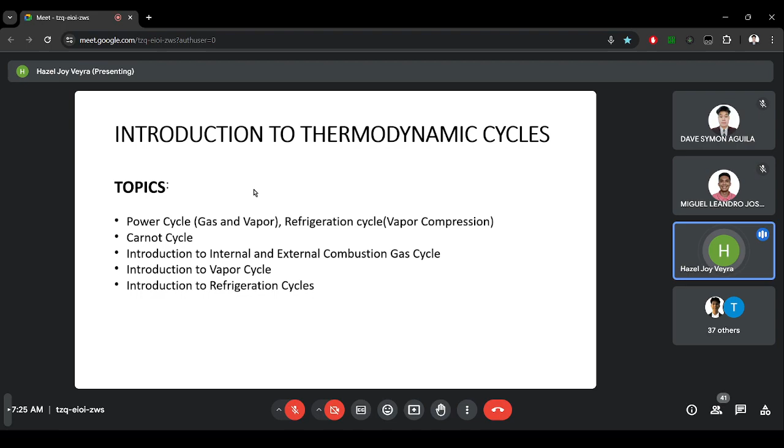Okay, so to start, we have two important areas of application of thermodynamic cycles. First one is power generation and second one is refrigeration. So what do you think, guys, is the difference between the two? Anyone, you can raise your hand. What is the difference between a power generation and a refrigeration cycle? Class, anyone?

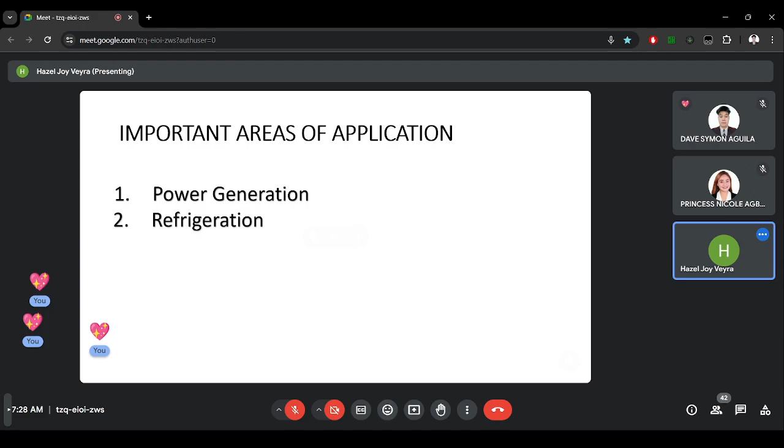Sige nga, Miss Kalingasan, can you discuss: what is the difference between the two? Ma'am, kapagka po power generation, usually po yun po yung pinaka-energy source po ng mga thermodynamic systems. Tapos kapagka naman po refrigeration, parang doon na po umiikot yung magiging output po. Output of? Output po ng mga cycles po.

Okay, so to repeat, class, power generation is more of generating power. So you will have here the work or power being generated by your system, or energy generation. And then for refrigeration naman, these are systems that are used to produce a refrigeration effect. So dito papasok yung ating mga HVAC. For example, we have the air conditioners, refrigerators, or heat pumps.

So have you heard already of the acronym HVAC? Class? Are you aware of the acronym HVAC? Yes po. What is HVAC? HVAC stands for heating, ventilation, and air conditioning po. So, yes, that's correct. That's why, class, thermodynamics 1 is very important, since after this course you are going to proceed with the next application of thermodynamics, which involves HVAC, heating, ventilation, and air conditioning.

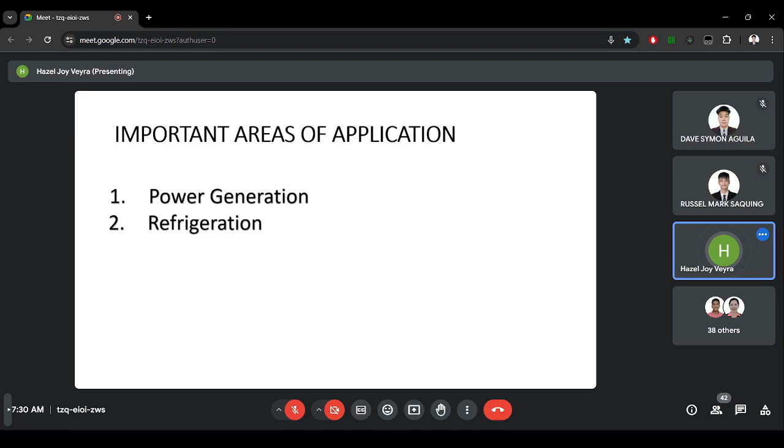So, if your foundation in thermodynamics 1 is not that strong, or you're not well versed with the concepts of thermodynamics, then it will be hard for you to proceed with the other areas of application. So yeah. Okay, so next we have the two general categories of thermodynamic cycles.

So we have power cycles and refrigeration cycles. This is similar with what I mentioned earlier. So we have power cycles, which involve engines like heat engines, or turbines, compressors. And then for refrigeration cycles, again, we have air conditioners, refrigerators, and heat pumps. So those are the two general categories of thermodynamic cycles. First one is areas of application, then this one is the two general categories.

So anyone, can you repeat what I said? What are the examples of power cycles and refrigeration cycles? Ceus? Ceus? Please give me an example of a power cycle and an example of refrigeration cycle. Mr. Angeles? Class, are you listening? Mr. Batas?

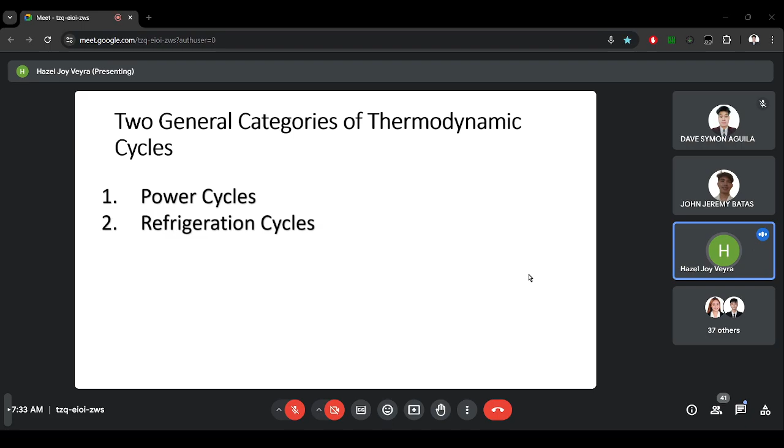Okay, Mr. Ceus. Hello po. Umalis po ako sa power cycle, pero ang alam ko po yung power cycle ay basta po sa engine. Sa refrigeration cycle po is air conditioner po, mga heat pumps, and mga parang HVAC po. Okay, very good. So, that's correct.

Now, let's proceed to other categorization of thermodynamic cycles. So, we have gas cycles and vapor cycles. Mr. Anorico, can you define what is a gas cycle? Yes po, ma'am. Ma'am, paulit nga po. What is a gas cycle? Behavior po ng gases po.

Yeah. Okay, continue. Carnot cycle po, Rankine cycle. Parang choppy ata. Behavior of gases po, ang gas cycle. Tapos, ang mga common gas cycle po niya ay yung Carnot cycle, Otto cycle. Rinig po ba, ma'am? Yes, yes. How about vapor cycle? Brayton cycle po. Okay. Thank you, Mr. Anorico.

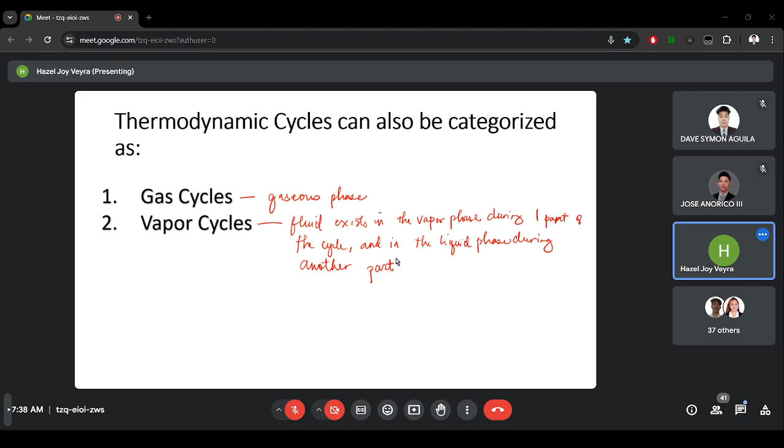Next, another categorization of a thermodynamic cycle is you can categorize it as an open cycle and a closed cycle. So I already mentioned this earlier. Who still remembers the difference or an example of each cycle? I mentioned it during the start of this discussion.

What is the difference between a closed cycle and an open cycle? This was also discussed during the start of the semester. But we have thermodynamic systems, the closed and open. So this is somehow similar to that. Can anyone please try to explain the difference between a closed cycle and an open cycle? Yes, Mr. Hossa?

Kapag po closed cycle, ma'am, yung working fluid po ay return sa initial state at the end of the cycle at recirculated po. Tapos kapag naman po open cycle, ang working fluid po ay renewed at the end of each cycle instead na recirculated po.

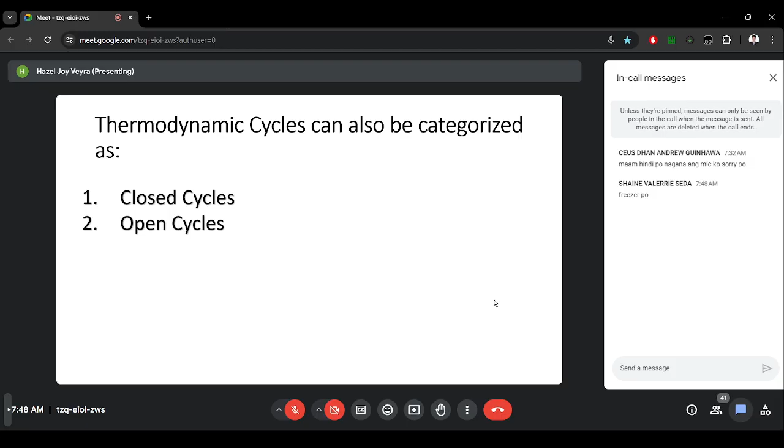Miss Shaine? Correct, yeah correct, it could be in the freezer. Paano, class? So that this is how our refrigeration system is working. So diba, you have your food or your water, and then you put that inside your refrigerator.

The wall itself of a refrigerator, yung inside wall of your refrigerator, is already the evaporator, class. That is where the heat from your food is being rejected, but the heat that is being rejected from your food is being added as heat on the refrigeration system. Again, diba, you have your walls, in your refrigerator you have your walls. That is where the heat is being added to your refrigeration system.

Kumbaga sa Tagalog, doon niya yung heat from your food doon niya tinatanggap. Doon napupunta yung heat from your food. Do you understand what I'm saying? So ganun siya, class.

So, yung heat from your food, if we go to the refrigeration cycle, that is your QA, your heat is being added in the system. And then, diba, when your heat is being added in your system, the refrigerant will then be compressed, and after compression your refrigerant's pressure will become high.

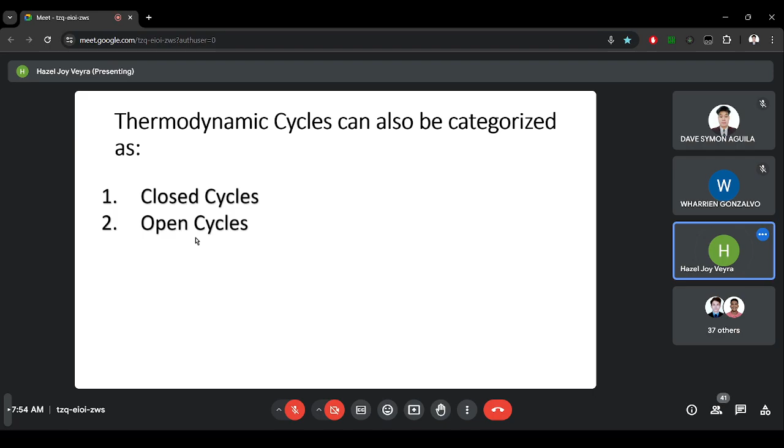Okay, now we are going to proceed to the topic of basic considerations in the analysis of power cycles. As you know, class, we always have an ideal state and the actual state in everything.

Let's say in a thermodynamic system, our ideal state is that there is no friction happening between our working substance and the surface wherever the fluid is flowing. That is the ideal state. But in reality, there is always friction between your working substance and the walls, for example, in your pipe. There's friction between the fluid and the pipe.

That's the reality, but for the sake of simplification of calculations later on, I will discuss the considerations we are doing to compute the parameters needed in a thermodynamic cycle. Let's say to compute the work being produced in a turbine, or the heat and everything, we are going to assume several considerations for the sake of simplifying the computation.

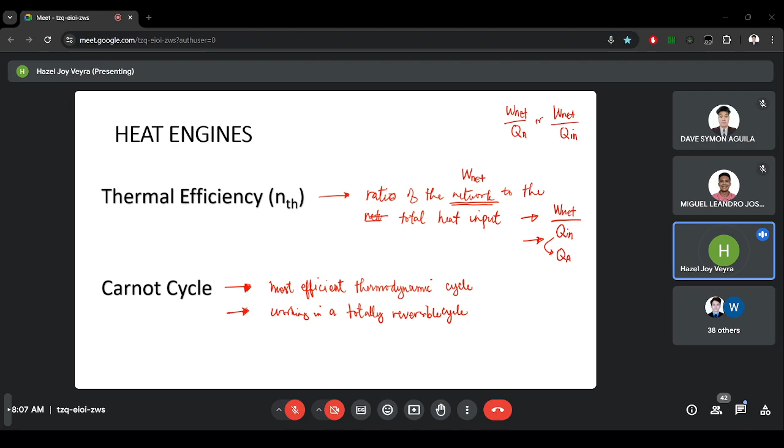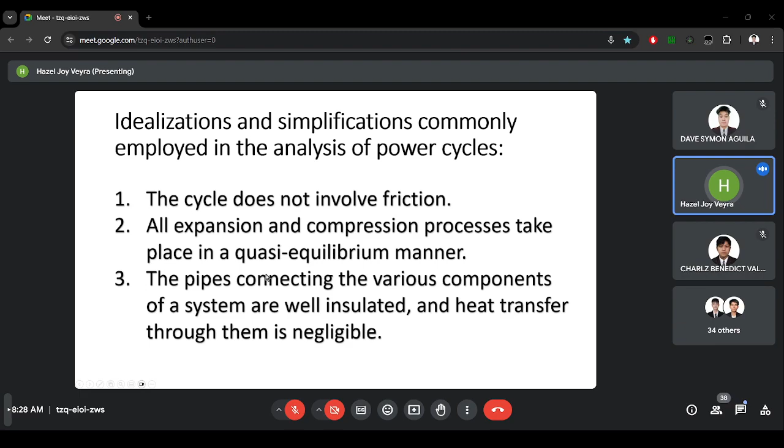So, it's already 8:28. And tomorrow, we are going to discuss the Carnot cycle and its value in engineering. So, if you have the book from last sem, do advanced reading, we will have recitation. And also, we are going to solve some problems under Carnot cycle. Okay, class? Do you have questions?

Result of your quiz 2, wala pa. Hindi pa ako tapos. I'm not yet done checking your test papers. But I will inform you once done.